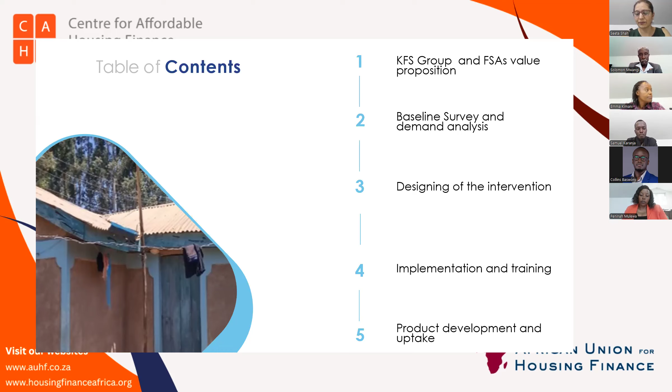To help reduce poverty, I lead the affordable housing pillar, and we also work to improve the enabling environment. With us today, we have a really exciting panel with representatives from our partner, the KFS Group: Emma Kimani, the CEO; Faith Wambugu, the head of operations; Penninah Mulewa, the FSA manager for Kakeani, one of the areas where we undertook the pilot; and also the regional team leader. We're joined also by Dr. Solomon Mwangi, senior building construction expert with experience in many African countries and globally, and his assistant, Samuel Karanja. So the format of the webinar will cover understanding our partner KFS Group and their value proposition, how we undertook the baseline survey to understand the housing conditions and demand analysis, how we undertook the design intervention, the implementation and training of both the members of the FSAs and the artisans, and understand the product development and uptake. With that, I hand it over to Emma to take us through the FSA model.

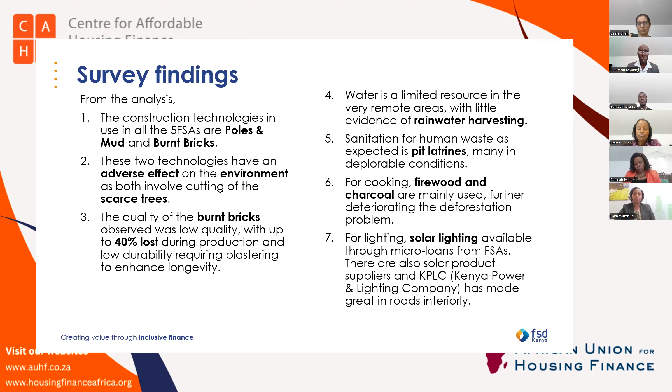Talking about construction technology, we focused more on the walling because in terms of roofing, metal sheets, corrugated iron sheets or box profile roofing sheets are universally available. This is the traditional design.

For Kathonzweni and Kakeani areas in Eastern Kenya, the main building material again was burnt bricks, which are not always very good quality and need to be improved sometimes by plastering to prolong their lives.

In Western Kenya, Malava, and also in the coastal region, Bamba and Matanomanne, the use of poles and mud was the main construction technology. Especially in Western Kenya, they always improve the quality of the poles and mud housing by plastering with local clays.

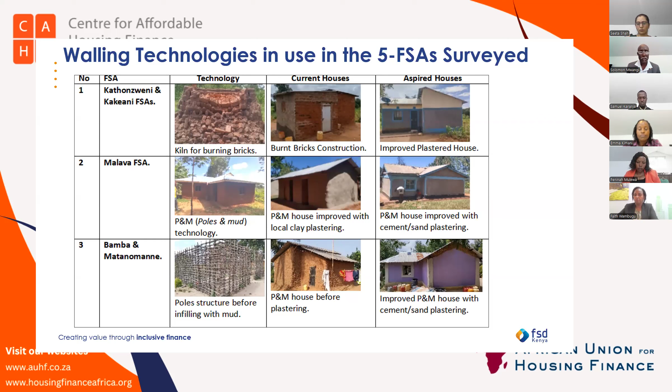In some cases, those who can afford it plaster the houses with cement sand mortar, which prolongs the lifespan of the houses. The same happens on a smaller scale in the coastal regions.

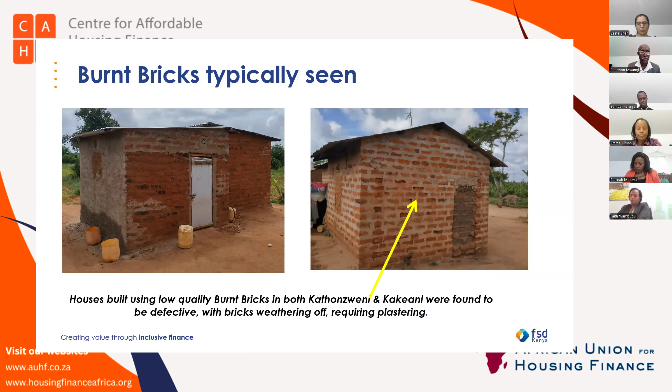From those pictures, you can also see there's a big wastage, as I was saying, 40 to 50% of the bricks are lost through the production process from molding, drying, and firing. That's also a big loss in terms of energy, resources, money spent, water spent, which unfortunately people in rural areas do not always count as a cost. And of course there's the inevitable effect on the environment.

Just for the record, the basic estimate is that you cut about 14 to 15 trees, which have taken 20 to 30 years to grow, to make enough bricks to build a 2 to 3 bedroom house, or one classroom. So you can see the impact on the environment.

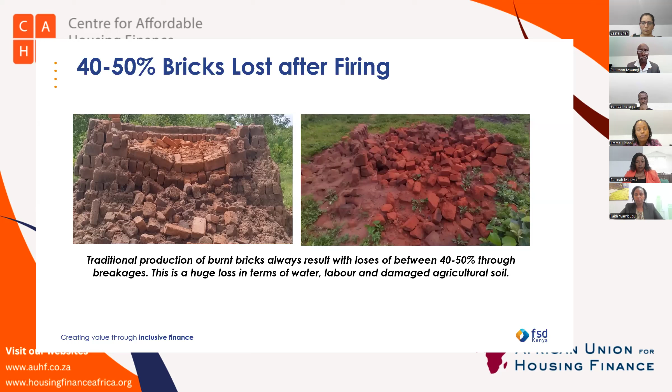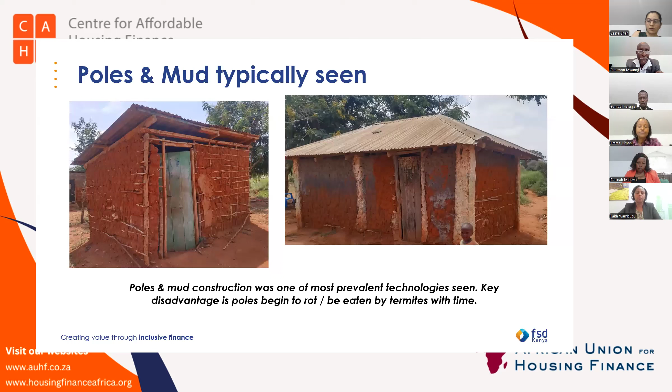And those are some of the improvements that the local initiatives incorporated by the local builders or local artisans, where they plaster the houses. Sometimes they reinforce with chicken wire, and that prolongs the lifespan of a house.

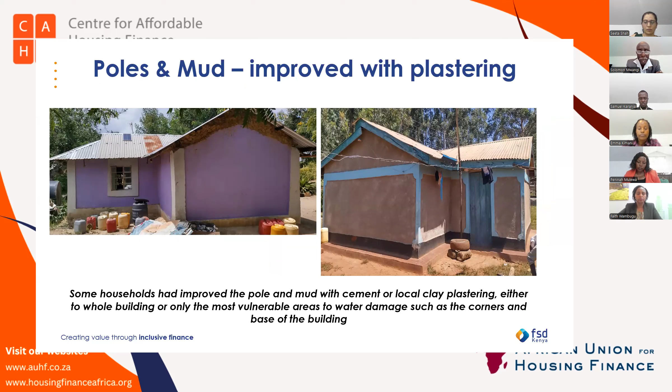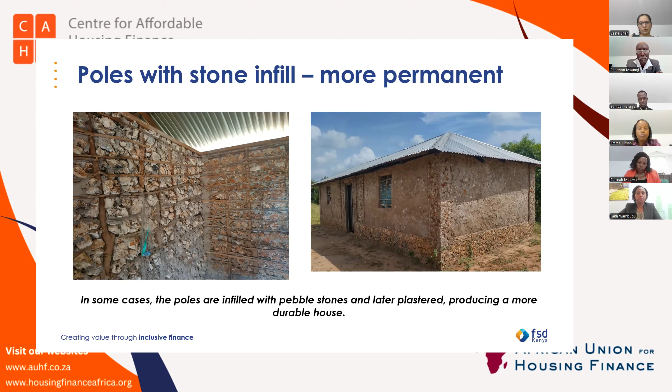In some areas, especially in the coast, they would still use poles and mud, and when there's a supply of pebble stones, they would fill in the gaps left by the poles and plaster the building. If done properly, that gives you a more permanent structure. So those were the main existing technologies.

When you make bricks, as you can see from those pictures, most of the soils or clays used are normally good agricultural soils. So there's an effect on food production, in the sense that once the soils are used, they are not replenished. And the continued cutting of trees has a big adverse effect on the general environment.

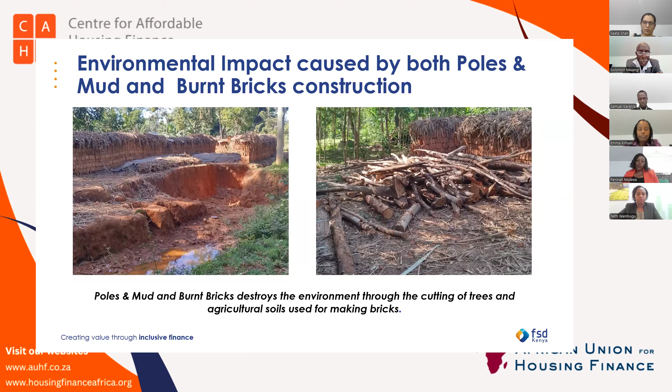In Eastern Kenya especially, there's a big abundance of sand, and I would say it is not fully exploited. You find sand in rivers, on the roadsides, and there have been a few initiatives of making sand cement blocks.

The only problem is the way they make them. They do it in a very unskilled way, whereby they try to spread the amount of cement to make up to 40 or 50 blocks. Then they are very poorly cured, and the result is that the blocks weather off with time and don't last very long.

But with some good training, that's a major resource which we looked at adding value to, making better blocks for more permanent houses.

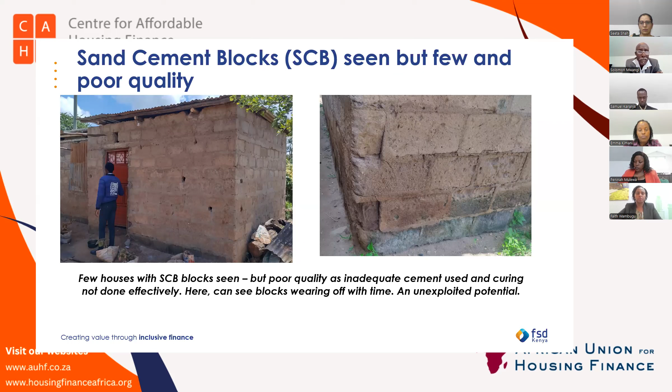Then, in a few cases where people are still searching for ways of building permanent houses, which is the aspiration of everybody, some people have gone to the extent, those who can afford it, of getting stones like 200 kilometers away from Thika. By the time you put up a building using those machine-cut natural stones, it doubles the cost of housing, and that's of course not an alternative for many people.

Not to mention also that in the long run, cost rises due to demand. Once you mine the stones, there's no replacement. So we have to come up with alternatives.

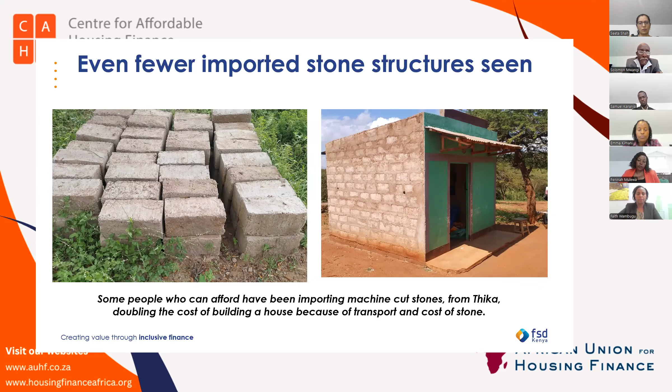In terms of water and sanitation, our survey revealed that especially in the semi-arid areas, with an exception of Western Kenya, Malava, there are a few cases of community earth dams, which collect rainwater during the rainy season, where people source water for domestic use but also for their animals. In a few cases, especially Western Kenya, there were wells.

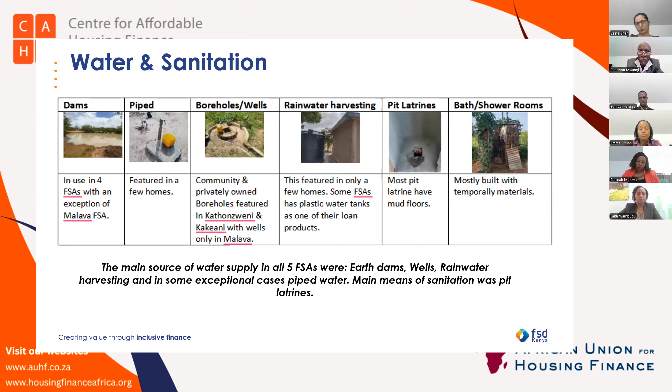For cooking, the traditional 3-stone continues to be used, which is dependent on firewood chopped from trees, from the forest or the few existing trees.

There have been a few initiatives of adopting better ways of cooking through improved fuel-saving charcoal cooking stoves, with a very small replacement of the 3 stones by improved firewood cooking stoves which save more firewood. With the 3 stones, you lose about 70 to 80% of the energy, whereas with an improved mud stove, you can maximize at least up to 70 to 80%. So that was another area we looked at for intervention.

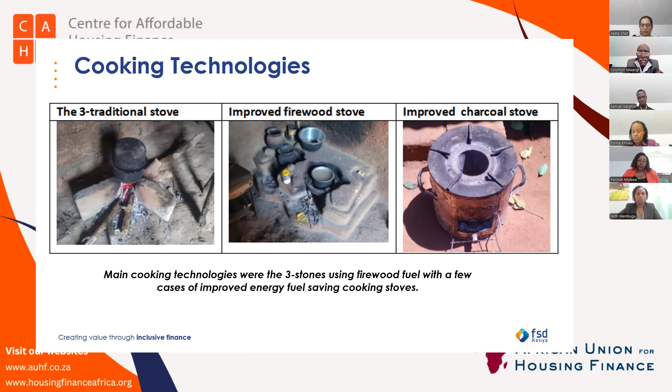For lighting, again the key thing is there's very wide adoption of solar lighting. There are really very many players, and it's very evident that almost in every other village market, there are all sorts of players trying to sell solar plants. So that is an ongoing thing.

And the Kenya government has made great inroads in supplying rural electrification to schools and the main shopping centers. But that still leaves a big majority without adequate power or lighting.

What we did, we based our findings or analysis on a 3-room house, ideally whereby you can have a sitting room and at least 2 bedrooms. The general finding from the survey was that the kitchen is always like outside, normally a standalone. So for areas such as Kathonzweni and Kakeani, the main building material was burnt bricks, and the cost of such a house per square meter would be around 14,000 Kenya shillings.

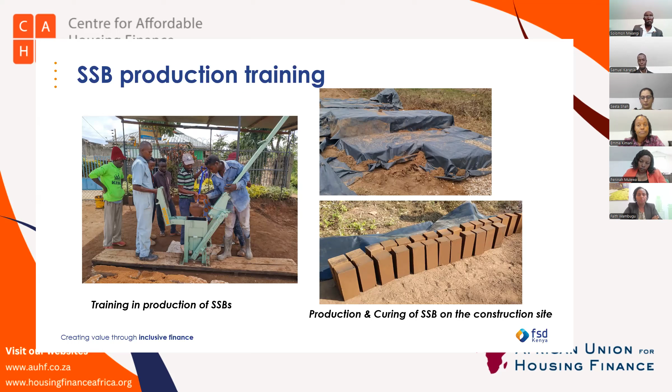Basically, as we mentioned earlier, ours was dealing mainly with the wall. We were doing the whole project from the ground, the foundation, the walling, and the roofing. But our technology emphasizes more on the walling, where we normally used the stabilized block.

This house used stabilized soil blocks, and we tried to emphasize the laying of the courses. We normally put a hoop iron on the 4th course, and you have to follow all the guidelines.

After you have done the slab, you have to put the damp-proof membrane for the purpose of preventing dampness in the house, and also put your hoop iron in the 4th course. If you want to put keys, as shown in the pictures, we wanted to encourage them to make the house a bit more neat.

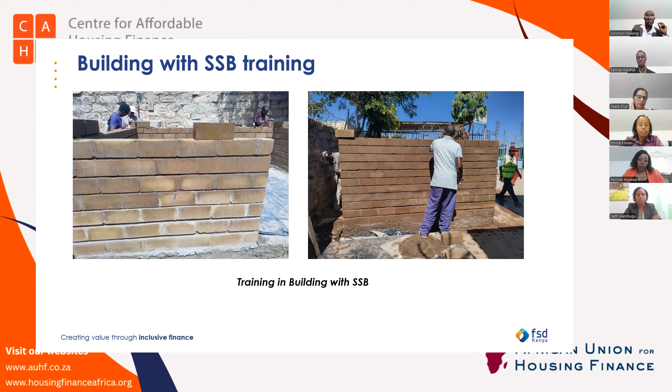For 1 bag of cement, you will produce around 35 hollow blocks. And for solid blocks, you will produce around 20 blocks.

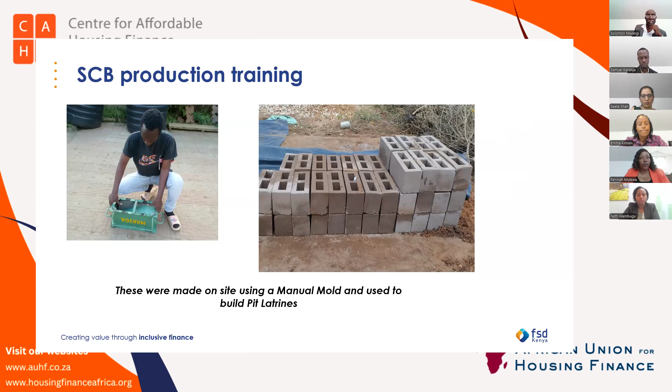The emphasis here is we just use a hand mold. You don't need any very special machinery; you can use the hand mold from one side to the other and make blocks on site. The key in sand cement blocks is the ratio of mixing cement and sand, and the curing process.

On the training point, there were those keys we were looking at. First, we mentioned that when doing the pilot, they had to have the machine, which is the one we showed you. We have two technologies, the SSB and SCB.

For SSB, the machine normally costs around 90,000, and you can purchase it from the FSA. There is a way you can procure it from them.

Normally, the material for stabilized soil and SCB you find right on your hand there. You have to remove the topsoil to get the good soil, which we call murram, and do the testing. That's what we call soil identification. The machine normally comes with a testing kit.

Production procedure is one cement for 14 buckets of soil, and this is for sand stabilized soil blocks. You have to use that ratio. If you are using a bucket, we normally emphasize people using a bucket because even a lay person can be able to do that. We also emphasize on curing.

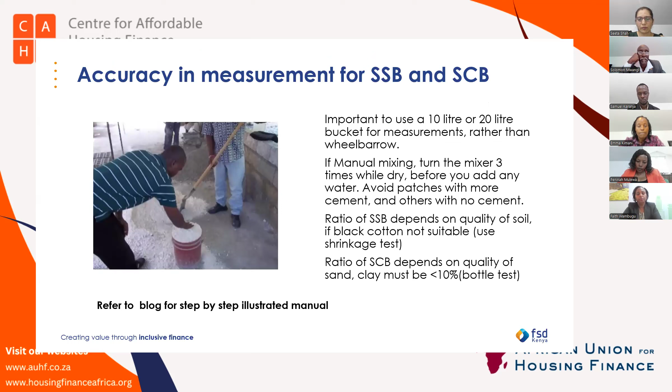I think we can move faster on this. Basically, the key meaning for this training is the production process, doing things like curing, using a bucket for measuring, batching out mixes, so that there's no shortcut, and that will get quality building materials.

I think again, part of the survey, what we found out from the housing, they had all these houses but no rainwater harvesting. That is an immediate solution to provide water for immediate domestic use. So the intervention there was to come up with gutters and a water tank. That's further evidence of that.

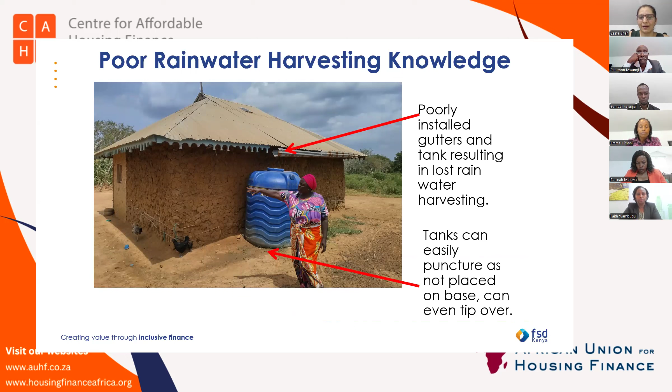Here we can even see that when the tanks were there, often they were not connected well. So, Dr. Sol?

One of the products introduced was to really explain all the elements that are needed to ensure the full rainwater harvesting is done effectively. And we sized it by the size of the tank.

I think the final product was a comprehensive package using several blocks or the sand cement blocks that we use for the pit latrine and bathrooms, how to harvest water with a plastic tank which are available everywhere, and then a good base, and that is it. With 1 or 2 rainfalls, you have enough water to keep the family going from one rain season to the next.

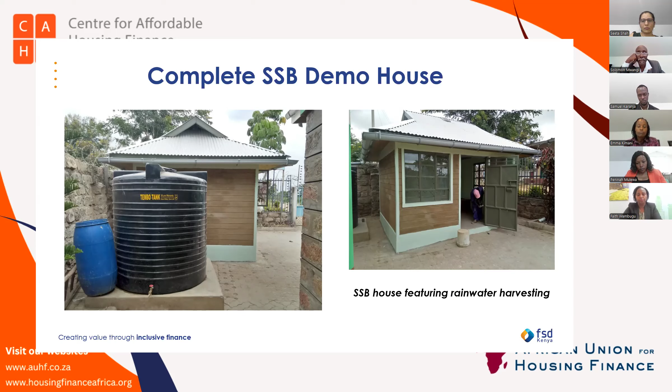The improved pit latrine. This we deal with the sand cement blocks, and you can see on the right the complete one.

The part of the training which has continued for the artisans is coming up with basic house designs and how to work out a bill of quantities. How much material do you need for every house? Because that is basically what the FSA members need when they want to take a loan, how much your 2-roomed or 3-roomed house costs. They normally depend on the rural builders. We don't have architects or engineers in the rural settings. The rural builder is everything, the barefoot architect so to speak, and the engineer and everything. So we give them those basic skills.

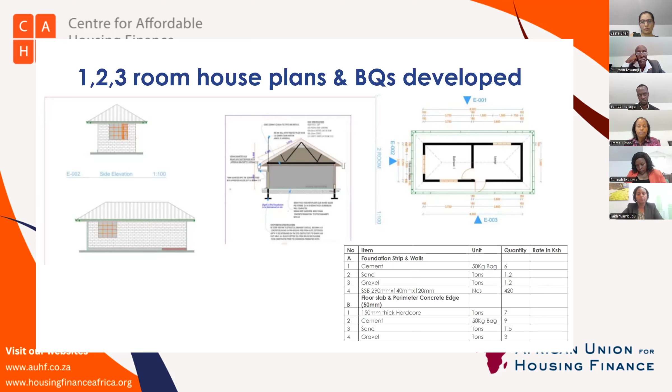The emphasis on the improved pit latrine, that is what was existent, which was often unhygienic and a very poor structure. What we came up with was an improved pit latrine which comes with an airtight cover. An airtight cover contains the foul smells, keeps away flies and the breeding of mosquitoes, and is generally very clean.

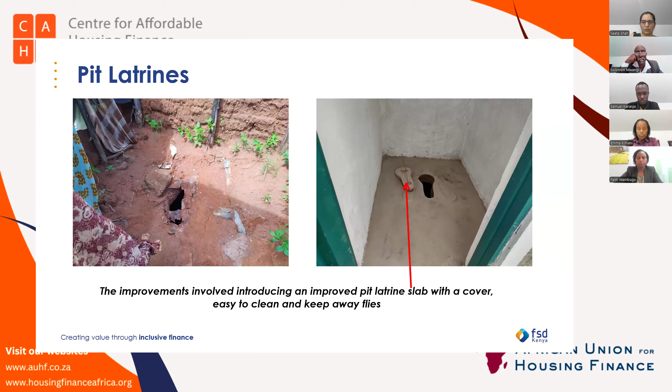We are all familiar with the 3-stone cooking method, which we already said wastes about 80 to 90% of the energy because it's scattered everywhere, and you only use about 10%.

For people who need to make ugali and a stew as another meal, they can just cook simultaneously. Using the same blocks, we built and demonstrated that, and a number of people have started adopting it using the blocks they already have, whether mud blocks, our improved bricks, or unfired bricks.

That's about it from my end. This is really to showcase that all this information has been made available on our website. We've published all the documents, so please do take a look at them. I'll hand it over to Faith and Penina to talk about the product development.

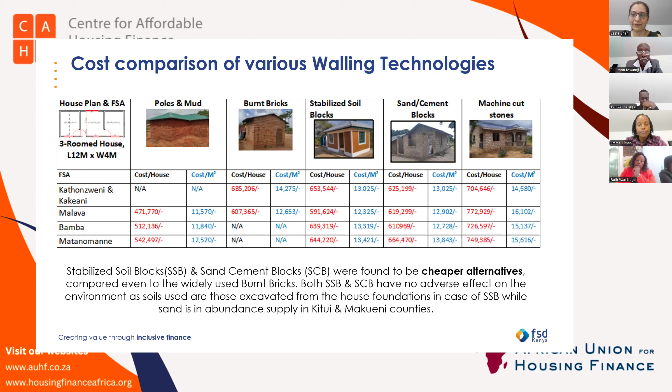So those are the two technologies that affect the walling. Then the rest of it is just how do you build better? How do you make the foundation better? How do you make the roof better? How do you make sure that the rainwater harvesting is done effectively, because there is a need, but how do we make it effective? So I hope that answers your question.

We're really, really grateful to FSD because from the get-go, they've been very eager to share. So all this information together with today's presentation is on our website, and then we'll just add today's presentation, which largely consists of extracts from what's already on the website and a bit more information on FSD. I want to draw a bit of attention again to this rainwater harvesting, if Dr. Solomon wants to speak to it a bit, what you prescribe as a full solution.

Okay, say that again, Seeta. Could you describe how you prescribe the full solution for rainwater harvesting? So buying the tank is the most expensive in cost, but is not the end game. The end game is all these elements that you detailed. If you could speak to it.

Correct. During the baseline survey, what we found out, some members of the FSAs were already taking loans and would buy a water tank, but that was not the final answer. The situation being that they would still find members with a tank seated on the ground, sometimes very poorly installed. They could even crack or break. And then a very poor rainwater harvesting, no gutters. So our intervention was to show them how to do a proper rainwater harvesting by fitting in the gutters, which requires a good fascia board, as we call it, the timber which goes out the roof. And then we fix nice gutters and get the water flowing into the tank.

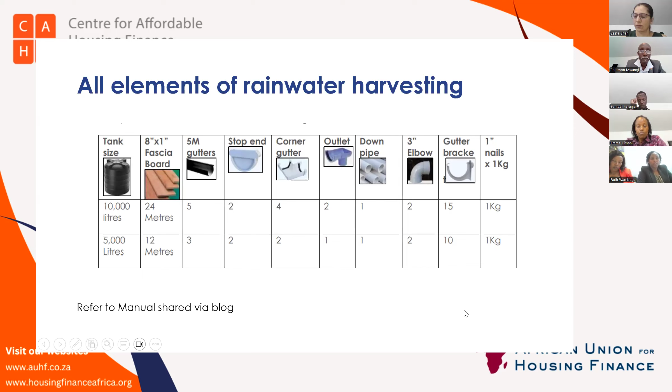Thank you for the other questions in the Q&A. From Caroline: was there any loan default and was the house insured? So far our repayments are 100%, and in fact some of the loans have fully been paid. The houses are not insured because they're just our normal rural housing, and maybe that is something for consideration in the future as we fine-tune the product.

Another question from Charles: are there plans to partner with local TVETs in having these technologies accredited? I think—Dr. Solomon, I don't know if you want to add to what I say—but maybe we can speak about how we did find the artisans to start with.

The way we approached this pilot project, we actually just depended on the FSAs to get us the local artisans who the people depend on, and then we gathered them together during the pilot project, engaging them in the entire process of block making. They know how to test the soils, how to make blocks, and how to build with them. So they were in the whole process. In terms of replicability, it's just now a question of whoever wants to build a house having access to these people—from the FSA we also have their database, their contacts. Whoever wants to build a house or make blocks, we just use those people. As I said earlier in my presentation, we also incorporated students from the polytechnics, because the future generation will be involved in these constructions.